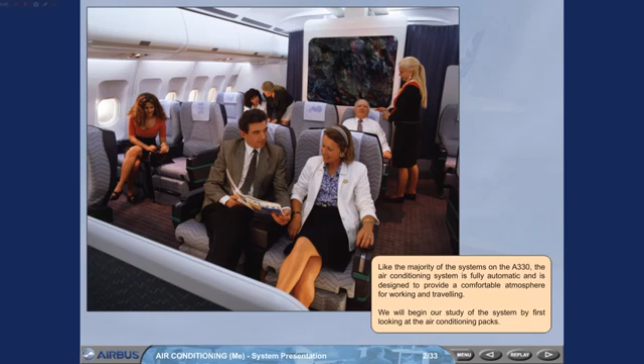The A330 is equipped with two air conditioning packs, located in the belly fairing, just forward of the landing gear bay. Let's look at how a pack works.

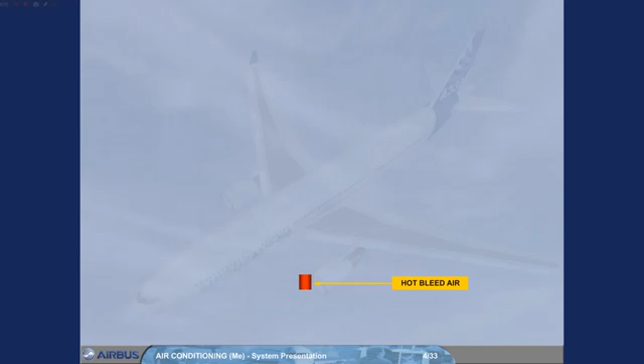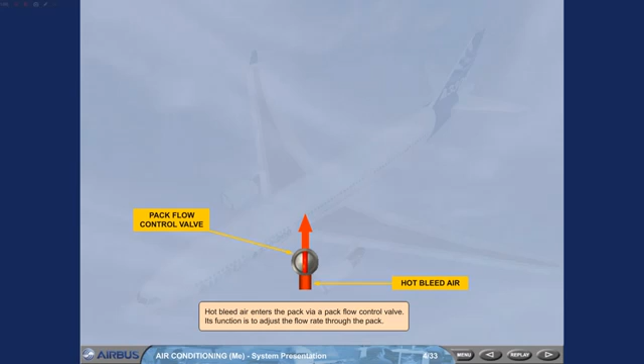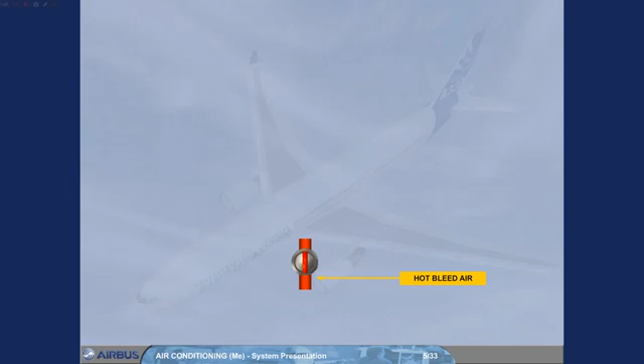Hot bleed air enters the pack via a pack flow control valve. Its function is to adjust the flow rate through the pack. The air then passes through several stages within the pack, heat exchangers and air cycle machine, so that it is cooled to provide a conditioned air output. In fact, sub-zero temperatures can be achieved.

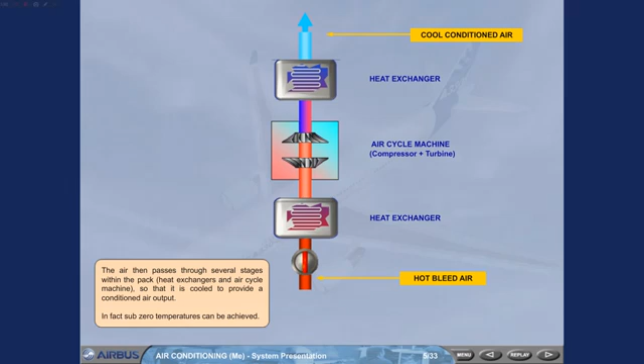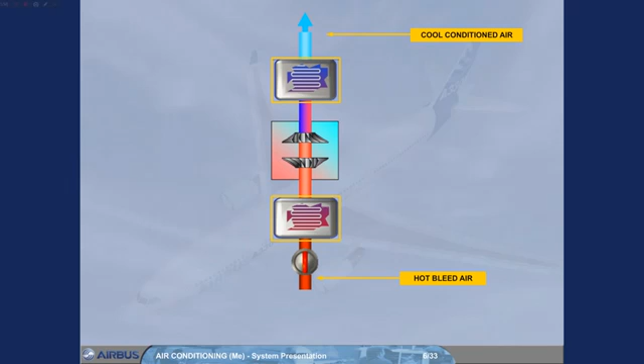Two of the stages are heat exchangers. They cool the hot bleed air using the flowing ambient air. This flow of air enters via the ram air inlet flap and exits via the ram air outlet flap.

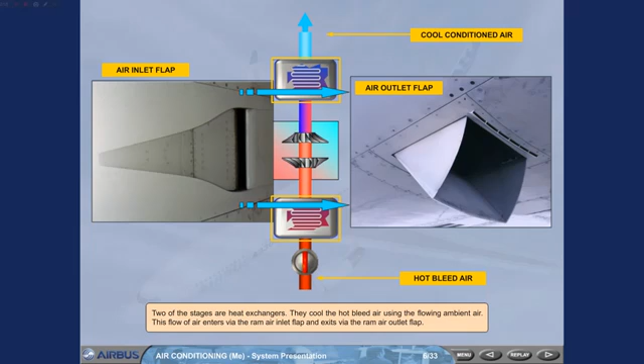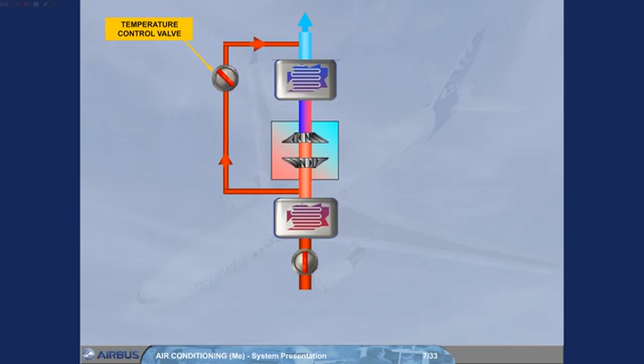A temperature control valve is fitted and can modify the pack outlet temperature by adding uncooled air to the turbine outlet flow.

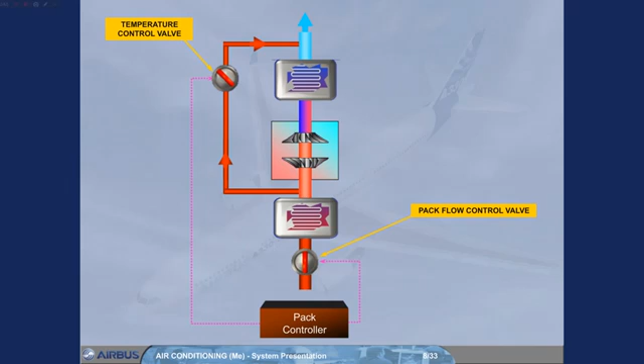The pack flow control valve and the temperature control valve are regulated by a pack controller to vary the flow rate and the temperature output.

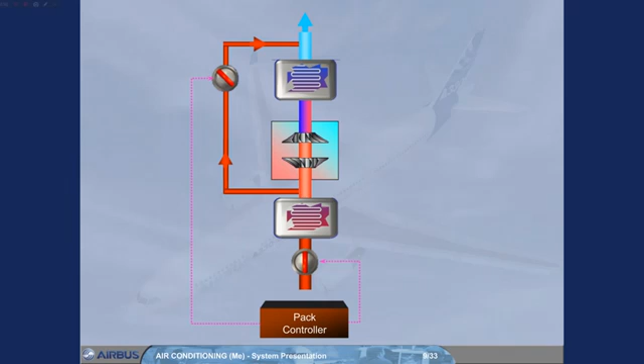The pack controller also controls the ram air inlet and outlet flaps to adjust the amount of air blowing through the heat exchangers. Note: the ram air inlet flaps close during takeoff and landing to avoid ingestion of foreign matter.

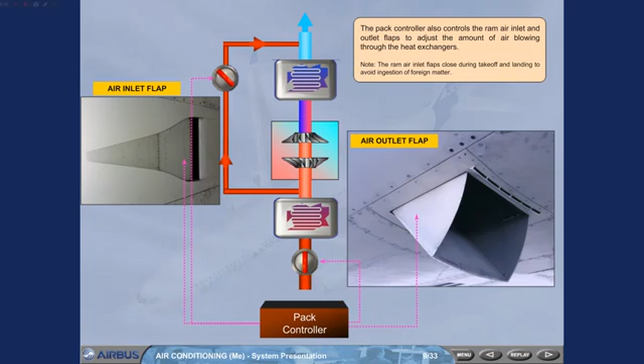To make things simpler, let's define the area within the black box as a pack. The two air conditioning packs operate automatically and independently to provide cool, conditioned air.

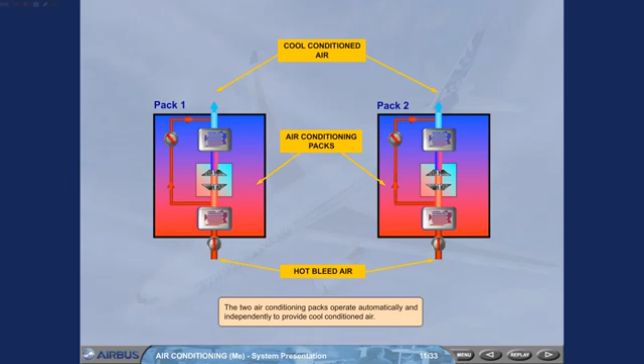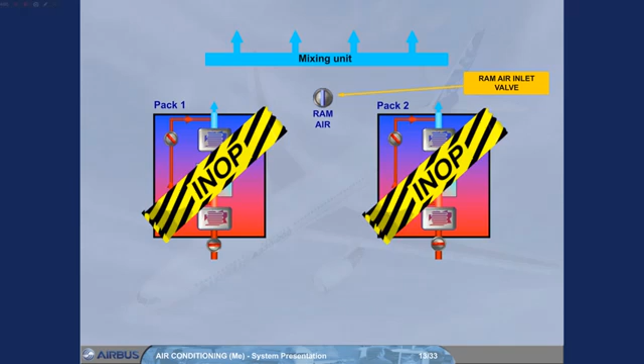The conditioned air from the packs is then fed to a mixing unit. In case of failure of both packs, an emergency air supply is provided via a ram air valve to ventilate the cockpit and the cabin or to remove smoke.

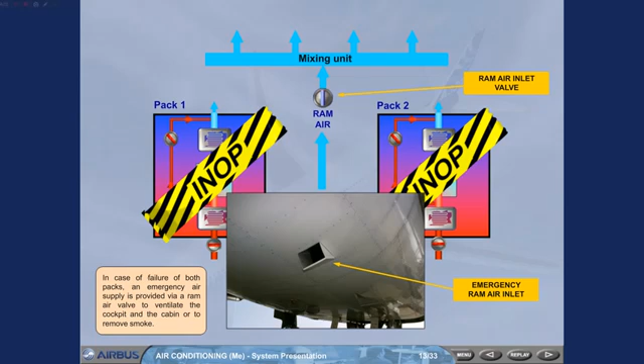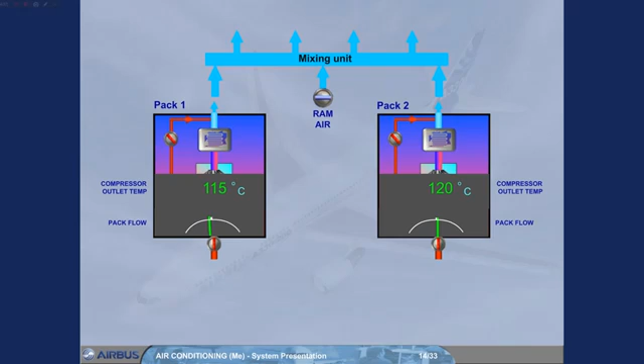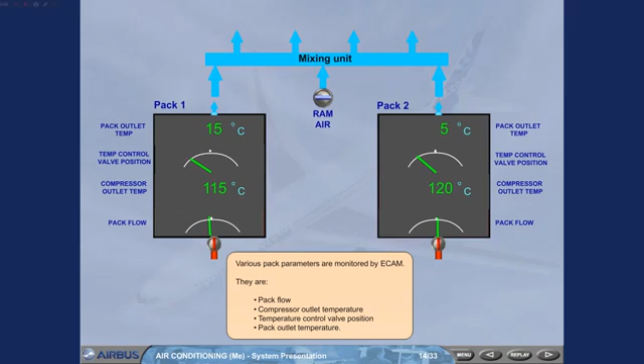Various pack parameters are monitored by ECAM. They are pack flow, compressor outlet temperature, temperature control valve position, and pack outlet temperature. These parameters with the valve positions are displayed on the upper part of the ECAM bleed page.

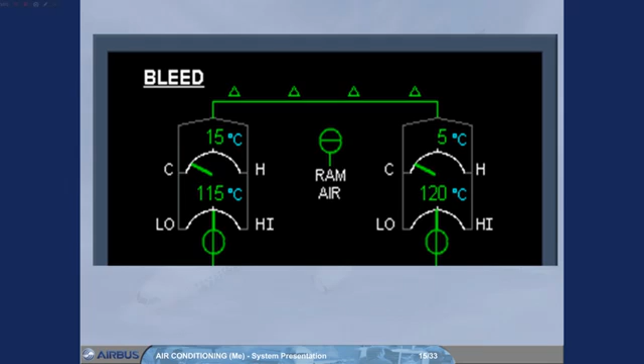Having discussed the air conditioning packs, we will now look at how temperature and flow regulation is achieved throughout the aircraft.

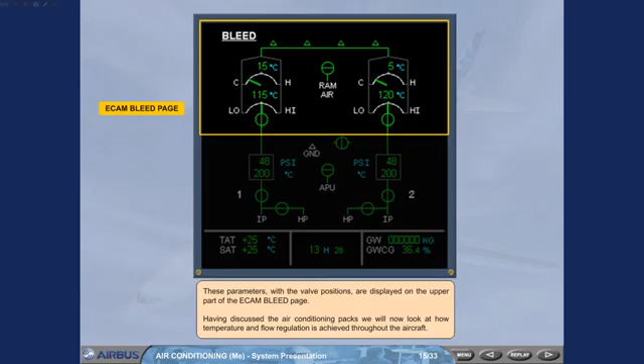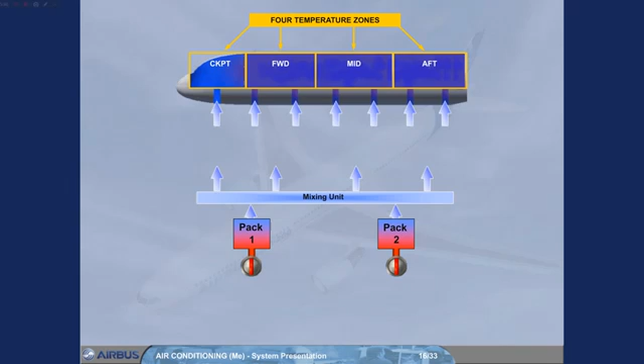The 4 outputs from the mixing unit feed 4 separate aircraft zones: the cockpit, the forward cabin, the mid-cabin and the aft cabin. Let's look at how the temperature of the zones is controlled.

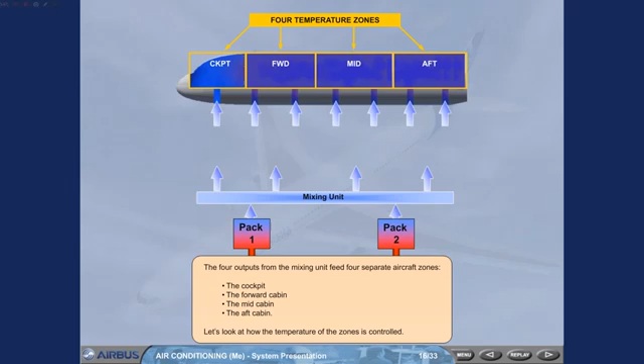A zone controller monitors the temperature of the 4 zones and sends signals to the pack controllers to set the air temperature delivered by the packs.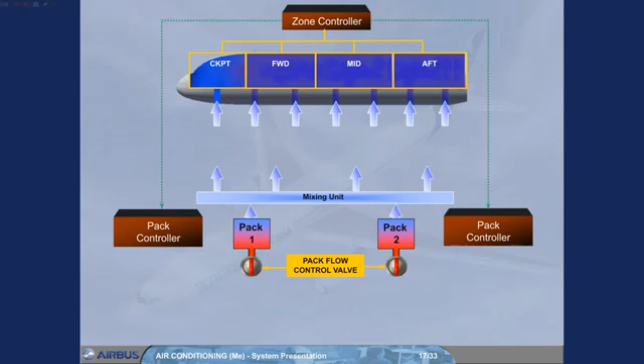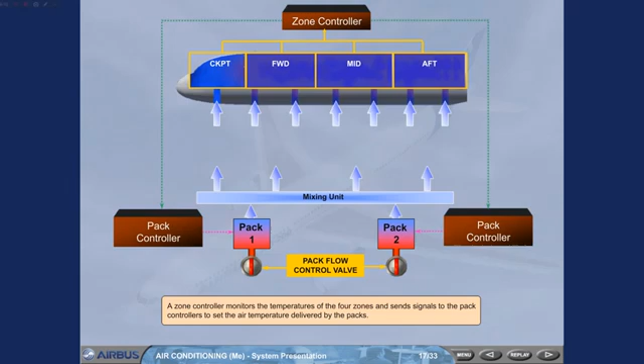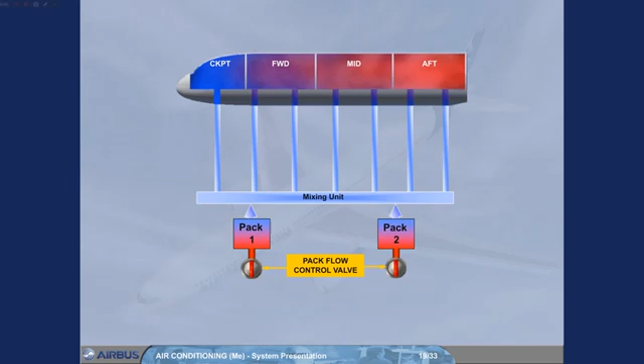Normally, cold air is delivered by the packs and is then sent to the 4 zones. Since the different areas of the aircraft may require different amounts of cooling or heating, hot bleed air can be

added via trim air valves to achieve the demanded temperature for a zone. These valves are controlled by the zone controller.

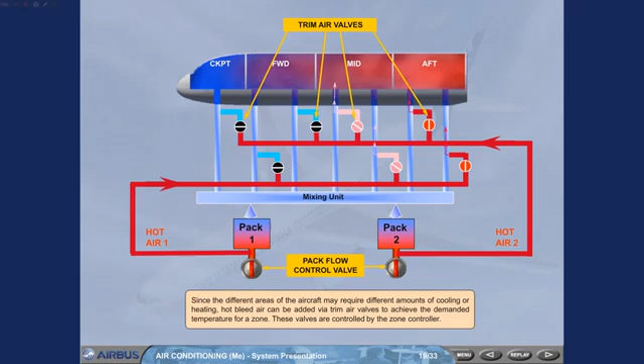In the example shown, no hot air is being added to the cockpit and the forward cabin zone. Some hot air is being added to the mid-cabin zone and a lot of hot air is being added to the aft cabin zone.

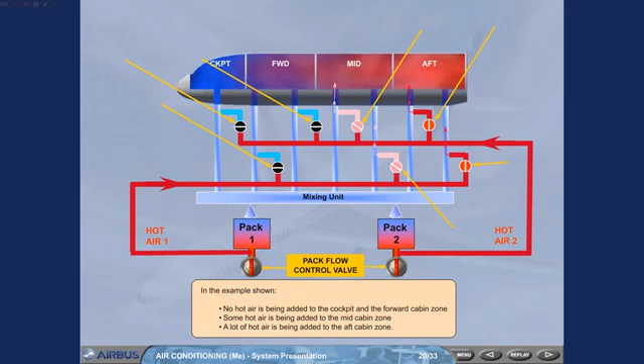The trim air valves are supplied via 2 hot air valves. These valves regulate the pressure of the hot air supplied to the trim air system for optimized temperature regulation.

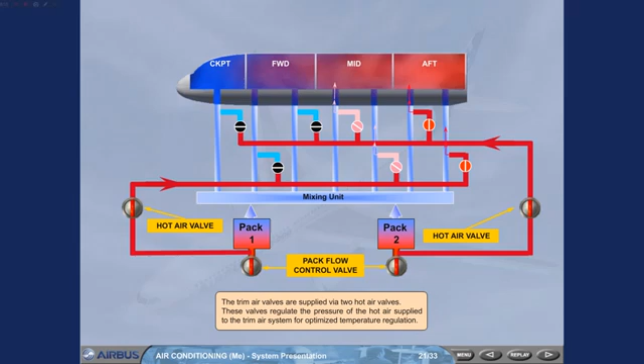A hot air cross valve is also fitted. It automatically opens when a hot air supply fails.

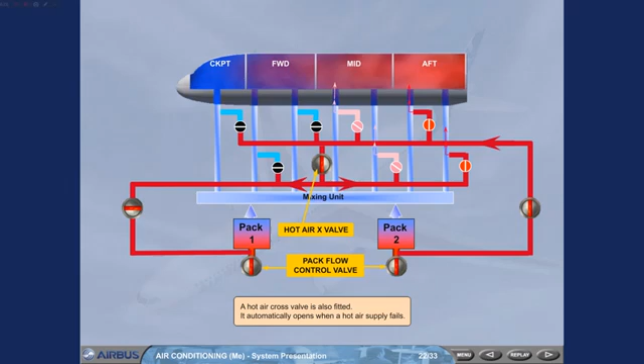Zone duct temperature, which is the temperature of the air entering a zone, the zone temperature itself, and all of the system valves are monitored by the zone controller.

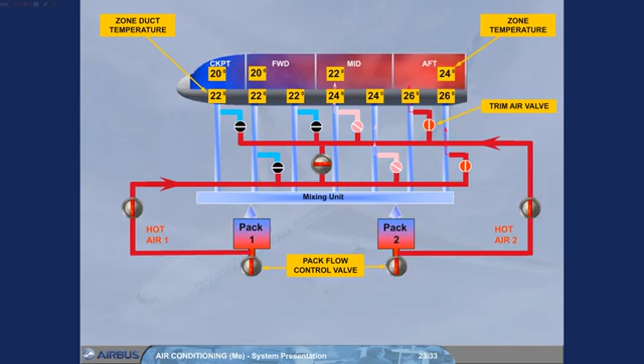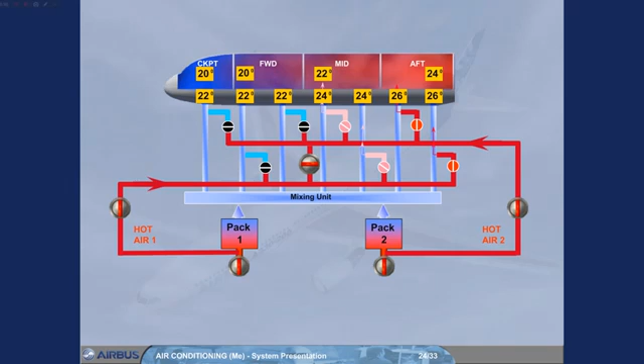The trim air system, the hot air system, the zone duct temperature, and the zone temperature indications are all displayed on the ECAM conditioning page.

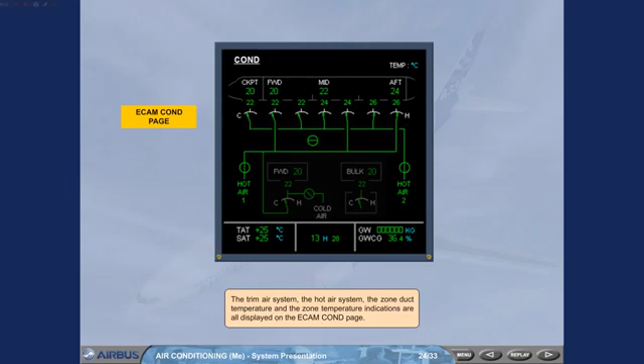The ECAM cruise page also displays the zone temperature indications.

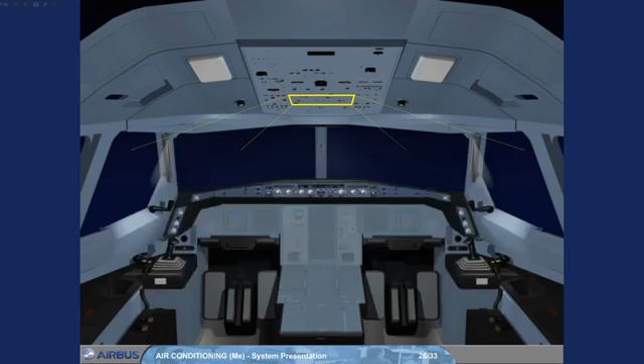The air panel on the overhead panel allows the pilot to control the air conditioning system. Let's look at the controls on this panel in a little more detail.

The pack push-button switches control their associated pack flow control valves. The pack flow selector is used to select the needed pack flow.

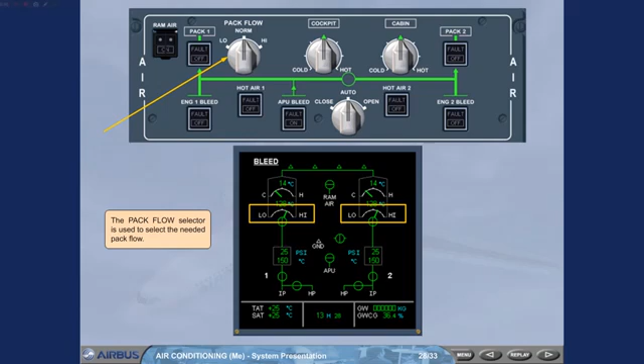The guarded ram air push-button switch controls the emergency ram air inlet valve. In the example shown, this valve is closed. The use of the ram air push-button switch is restricted to abnormal conditions and will be discussed later.

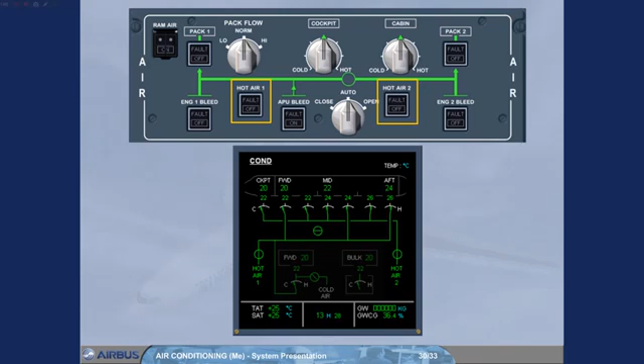Each hot air push-button switch controls its respective hot air valve. In the example shown, the valves are open. Now let's look at temperature control.

The zone temperature selectors are used to adjust the required temperature for the associated zone, cockpit and cabin. Note, each cabin zone temperature can be optimized through the forward attendant panel.

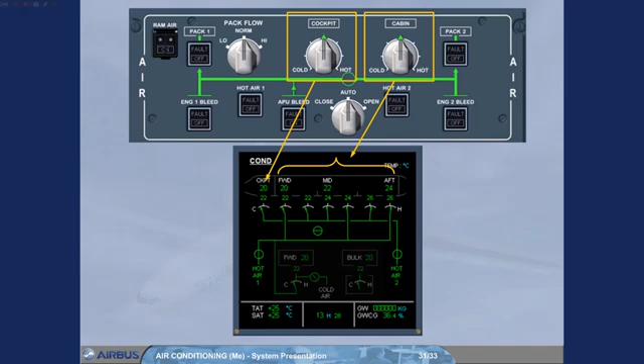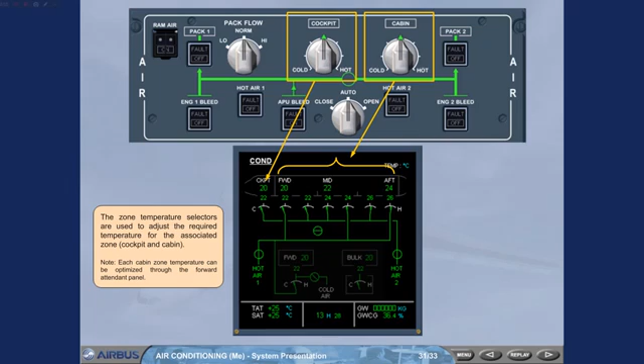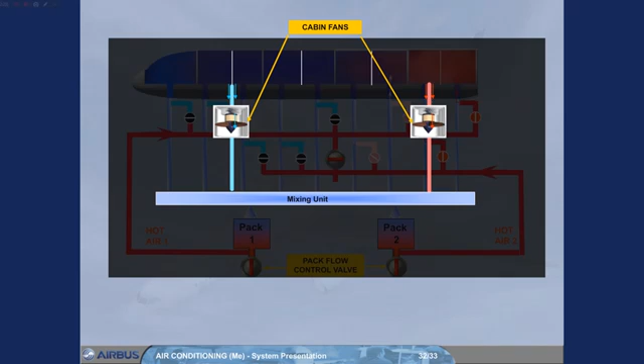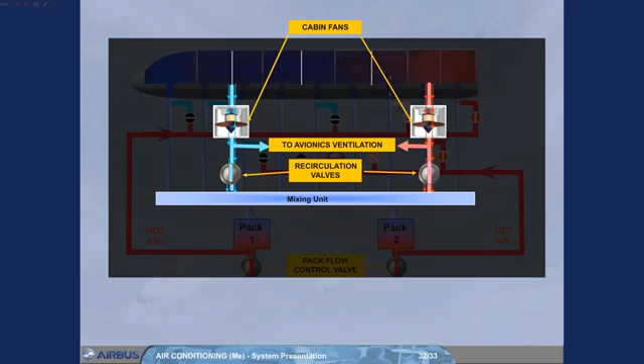Note, in normal operation, there are no ECAM indications linked to the cabin fans. Also, the two recirculation valves will partially close if both packs are lost.

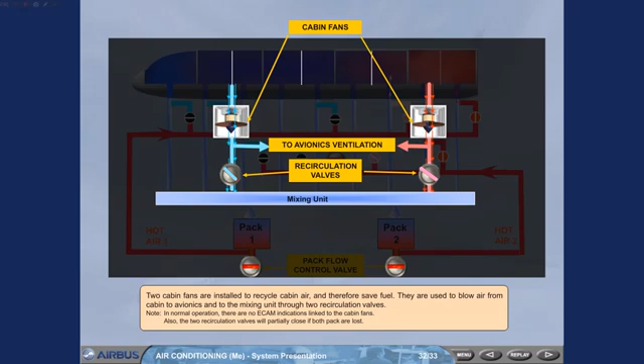A cabin fan's push-button switch on the ventilation panel of the overhead panel controls the cabin fans. This push-button switch can be used to switch the fans off in response to an ECAM procedure.